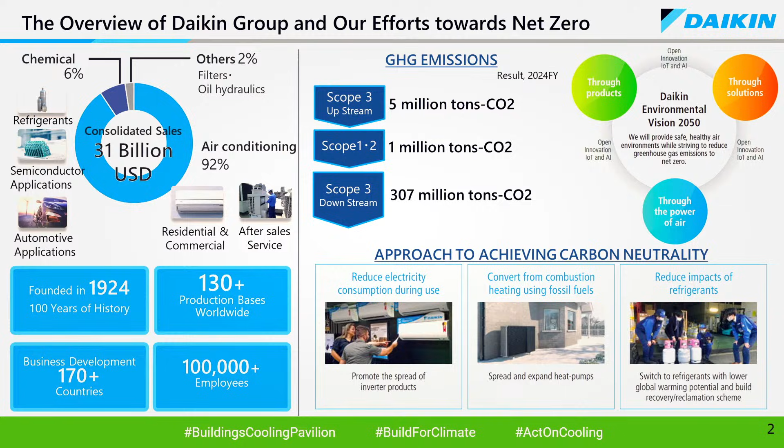We are aiming to achieve net zero by 2050. When we look at the GHG emissions, most of it comes from scope 3 downstream, mainly from energy consumption. This is why our focus is on reducing energy consumption during use, and heat pumps and so on. Daikin also supports the global cooling pledge.

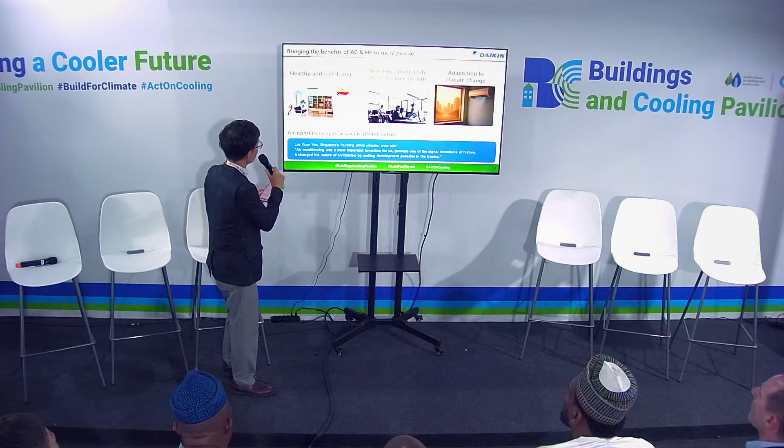As temperatures are rising, air conditioning is becoming a necessity rather than a luxury, as pointed out by Hubert in the beginning. Air conditioning contributes to healthy and safe living, boosting productivity and economic growth, and adaptation to climate change. The demand for air conditioning is expanding as a social infrastructure, and here it is extremely important to curb the rising electricity demand for air conditioning.

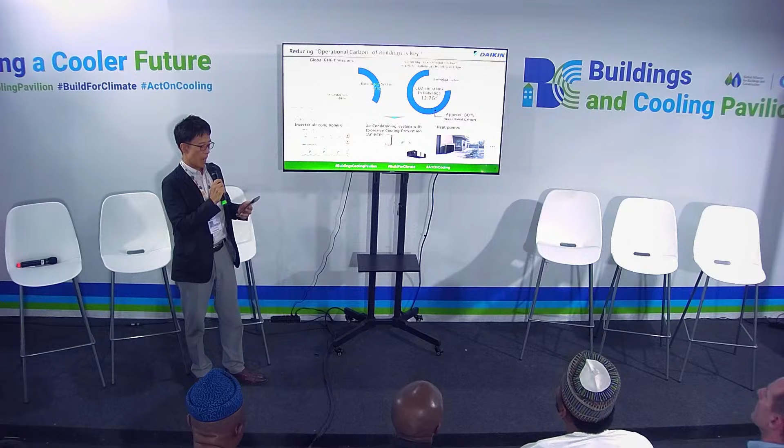When we look at the global GHG emissions, buildings are responsible for 34% of it, and most of it comes from the operational phase, as shown in this figure. So we believe reducing operational carbon is the key to decarbonizing the building sector. We offer solutions such as inverter air conditioners, air conditioning systems with excessive cooling prevention, ECP, which I will talk about later, and heat pumps and so on.

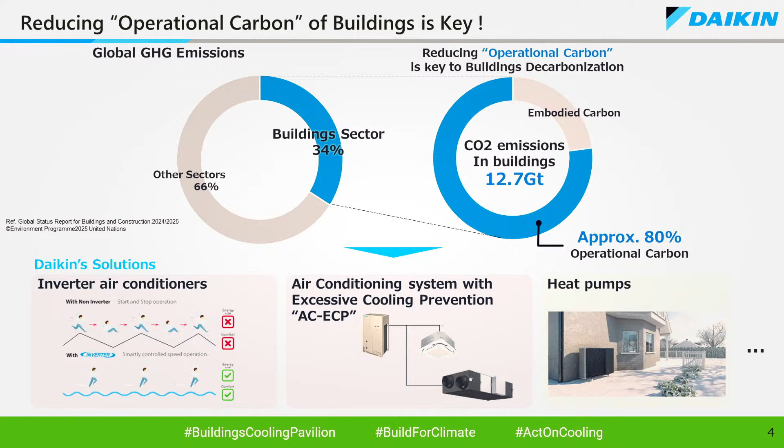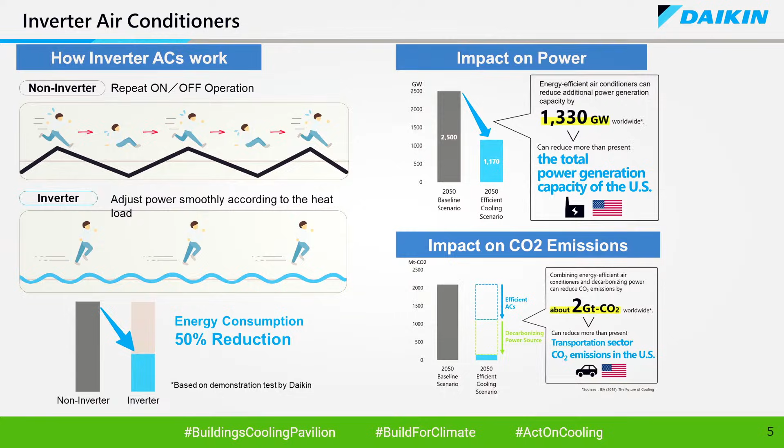First, inverter ACs. Inverter AC optimally adjusts its motor's speed according to the room temperature rather than frequent start and stop operations, and it significantly reduces electricity consumption and GHG emissions compared to non-inverter ACs. As you can see, about 50% reduction is possible just by using inverter ACs.

These tables show how much energy can be saved by inverter ACs in actual use environments. We have demonstrated energy savings in countries around the world, most recently in Nigeria, as Mr. Abdullahi presented, showing a 40 to 48% reduction. It was such a huge reduction. We knew that inverter ACs are very effective, but myself, I could feel that it's really a huge reduction, and it's very important.

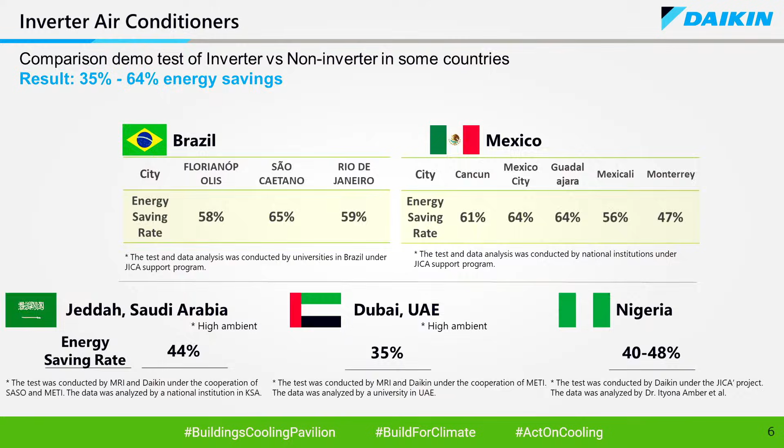However, as shown in this map, there are still many countries where inverter ACs are not widespread, such as Africa, Southeast Asia, Middle East, North America, and here in Latin America. So we need to accelerate.

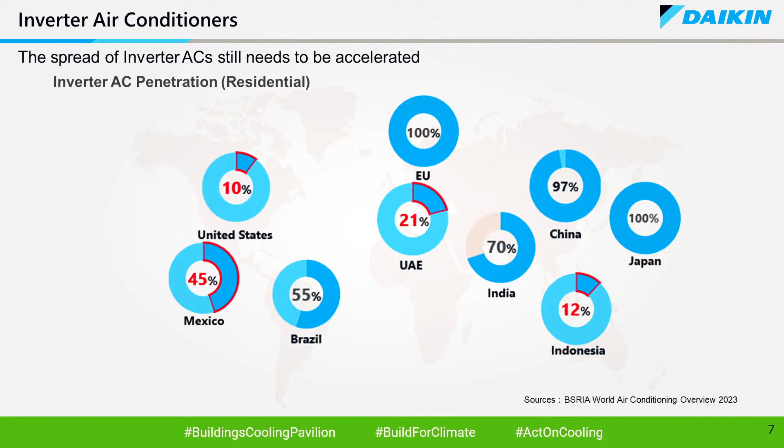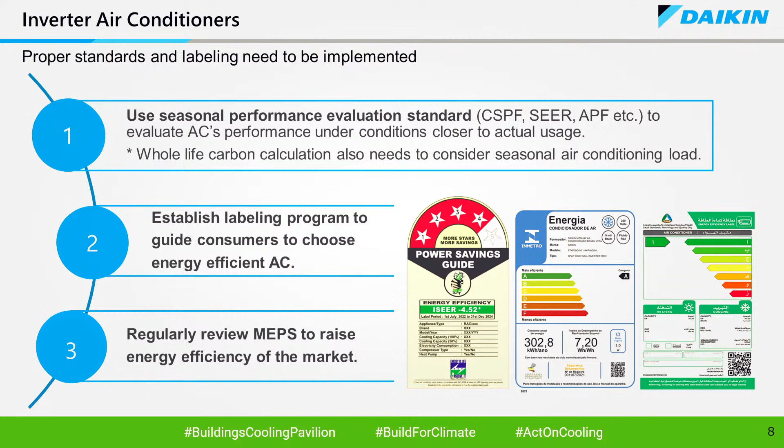We believe proper standards and labeling are key to accelerating its adoption. There are three key factors to focus on: first, a proper seasonal performance evaluation standard; second, a labeling program to guide consumers to choose energy efficient air conditioners; and third, regularly reviewing MEPS, the minimum energy performance standard.

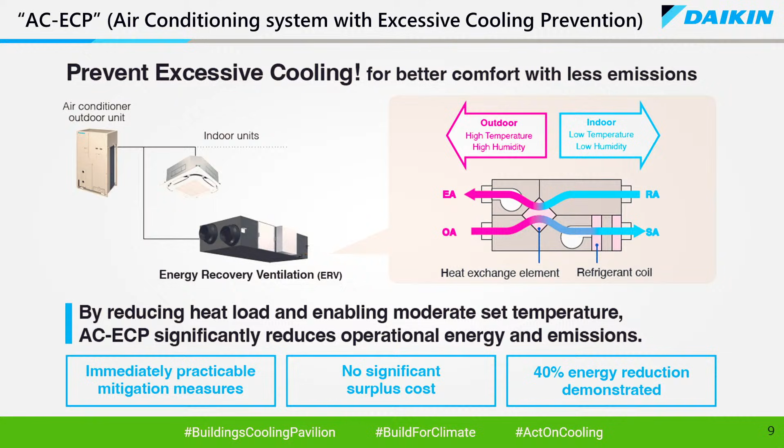If you ventilate rooms in a conventional way when you are cooling, you are throwing away cool air to the outside, and taking in hot and humid air to the inside. But with our energy recovery ventilation, we exchange both temperature and humidity of the air going out and coming in, to reduce the heat load of the air conditioning. Reduced indoor humidity enables users to set more moderate temperature, and this leads to huge energy reduction.

This system is an immediately practicable mitigation measure, and it requires no significant surplus cost. A 40% energy reduction was demonstrated in Thailand.

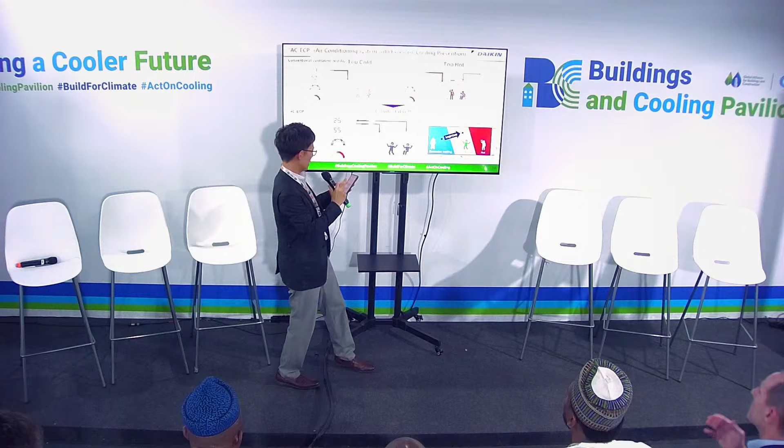Next slide please. This is how it works. When cooling, conventional ventilation systems throw away cool and dehumidified air and take in hot and humid outdoor air. Due to high humidity in the room, we need to excessively cool down the room, like 23 degrees. If they set an appropriate temperature of 26 degrees, due to high humidity in the room, they fail to achieve comfort.

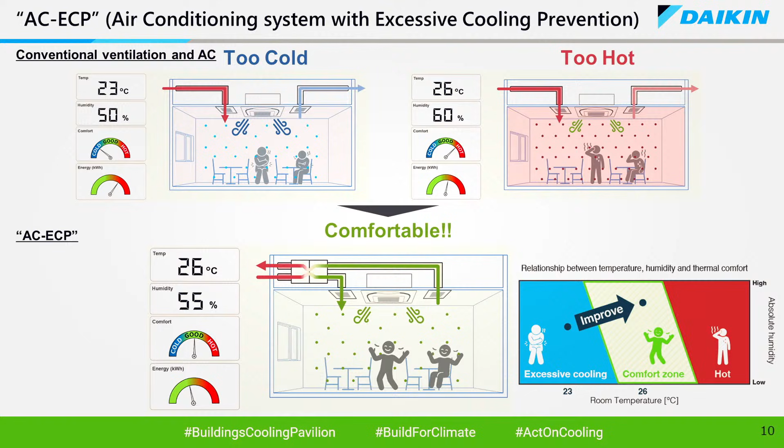But in our system, when we use the energy recovery ventilation, the incoming hot and humid air will be cooled by the air going out, and the humidity will be kept very low. This is why they can set a temperature of like 26 degrees, and still feel very comfortable thanks to the low humidity. This is how our system prevents excessive cooling of like 23 degrees.

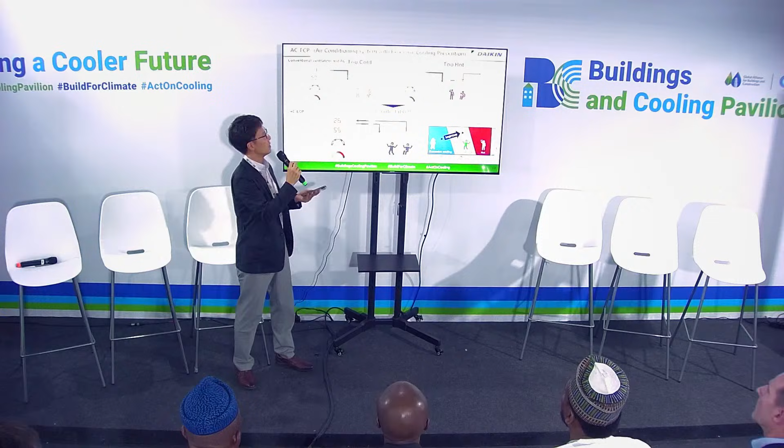Thank you. Next slide please. Finally, this is the result of our demonstration in Thailand. Energy reduction of approximately 40% was demonstrated, while comfort was improved according to the questionnaire.

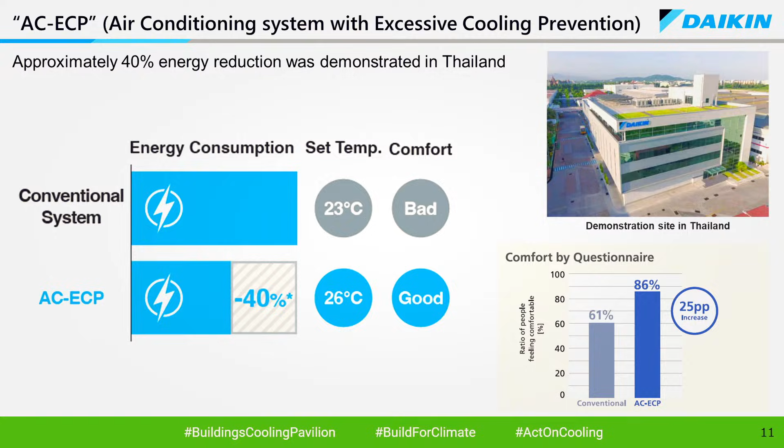Next slide please, thank you. I introduced two of our solutions that can significantly contribute to decarbonizing the building sector: the inverter ACs, and the air conditioning combined with ventilation, energy recovery ventilation. The point is that both of these technologies are not technology of tomorrow, but technology of today that we can implement immediately. As Daikin, we'd like to do our best to help implement these solutions to achieve decarbonization. I'll stop here. Thank you for listening.

Okay, thank you very much. I think the case has been made. In sub-Saharan Africa, we have had a lot of issues about dumping substandard products, but clearly Daikin is telling us that the technology is available. We need to make sure there's an uptake so we are able to get better technologies. We are not reinventing the wheel, technologies are available as indicated by Daikin, and so let's look at the effort to make sure this comes in.

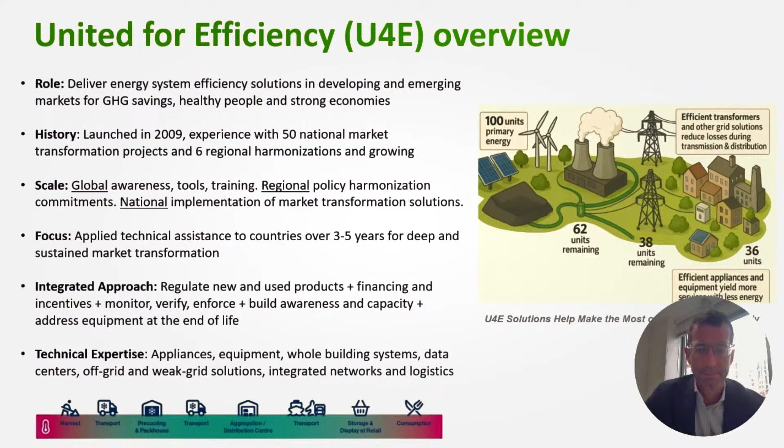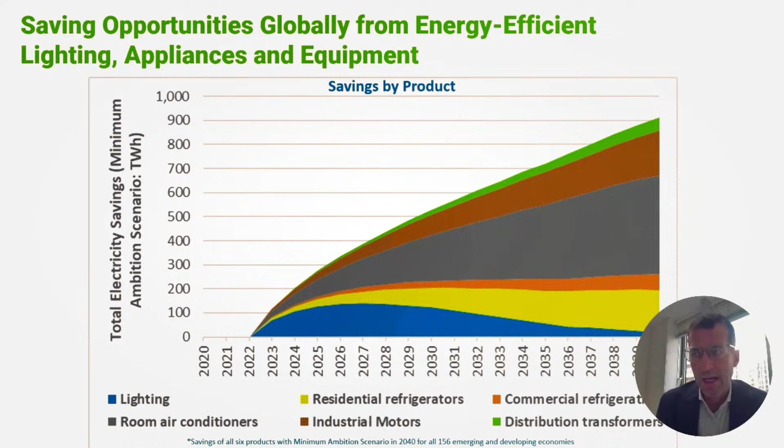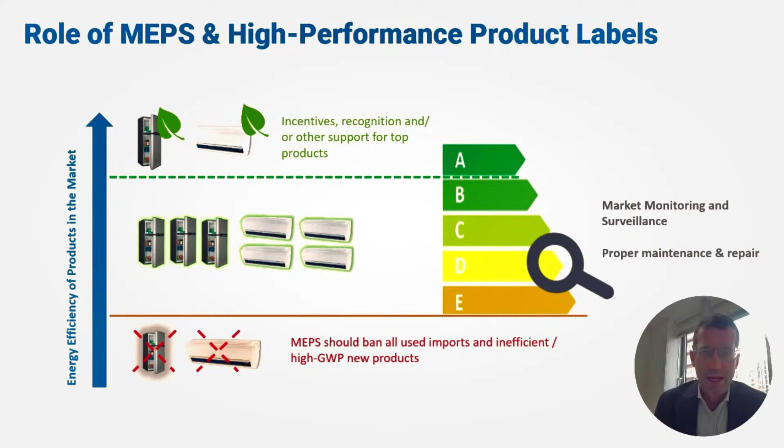On the approach we follow, we work on regulations which set the floor through minimum energy performance standards for products to enter the market. We use labels to incentivize higher efficient products through consumer awareness, and different financial and consumer awareness campaigns to incentivize the market further beyond the MEPS. Throughout that, we work on monitoring, verification, and enforcement, testing products to ensure compliance with regulations, labels, and incentives.

One of the key tools we've developed over the years is model regulation guidelines. We've developed these as templates for countries to utilize for developing regulations or incentives. It's available throughout the different product categories we work on, including residential refrigerators, room air conditioners, commercial refrigeration, and more. It's really a starting point for countries to consider adopting. It includes efficiency targets, recommendations for labels and the tiers within that, and for cooling products, lower global warming potential refrigerants.

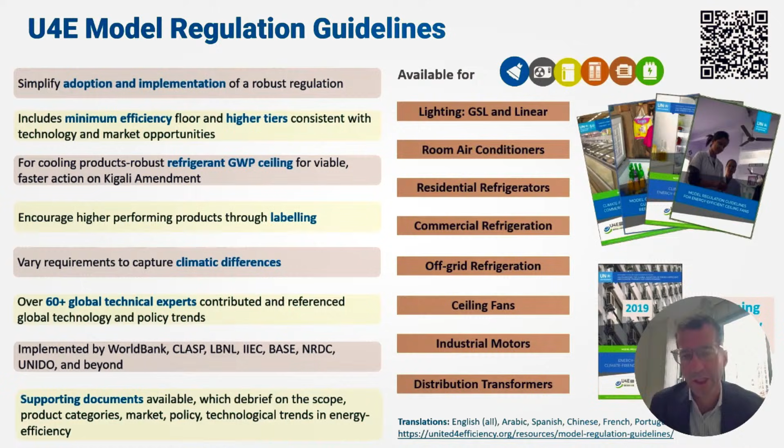I'm also pleased to announce that we continuously update these model regulation guidelines, and recently have done so for air conditioners, where we've expanded the scope to multi-split air conditioners and VRF systems, while increasing the higher capacity ranges, including new heating metrics, and an optional dehumidification performance recommendation. In addition, we've come out with new sustainable procurement guidelines for space and water heating, covering water-based heat pumps, systems, components, safety refrigerants, and life cycle considerations.

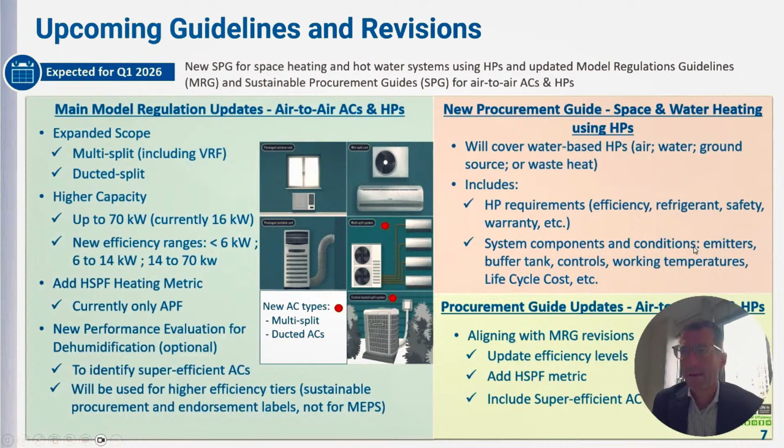Just to show how these have been utilized, we don't only develop them, but we also put them to use. In Southern and Eastern Africa, we've partnered with the regional centers, SACREEE and EACREEE, in their respective regions, and other initiatives with UNIDO and others, to harmonize standards for both refrigerators and room air conditioners. This is a regional standard, so really something that the region and national governments can take forward with implementation in their respective countries. It was developed over about a 2-year period with consultations at the regional and national level, and it's aligned with the U4E model regulations.

Continuing on, also in Southeast Asia, we've worked at the regional level with the ASEAN Center for Energy, and developed a regional roadmap for room air conditioners. I wanted to share that we've recently deployed that in Malaysia, and supported the government in upgrading their regulation for room air conditioners. We supported that with different tools: market assessment, techno-economic assessment, and different technical consultations. This included consultation with over 13 manufacturers to understand their timelines for implementing energy efficient policies.

So with that, I'd like to conclude and encourage you to engage with us, for example through our website, where all those publications, news, and more information on the model regulations is available. You can also subscribe to our newsletter. So with that, I thank you and wish you a very productive event, and look forward to engaging soon.

Hello. Okay, thank you very much. Unfortunately, Patrick couldn't join us here, but I'm sure a round of applause wouldn't be bad.

So basically, U4E has shown that again, we don't need to reinvent the wheel. They have a lot of materials, roadmaps, and benchmarks which we can download from their websites, and also look at it as countries to develop from it.

We have another person joining us virtually from the International Energy Agency, and she's in the person of Madam Sophie Attali.

Wi-Fi. Oh, sorry, you see the technological change. I think I'm being told we have a Wi-Fi issue, so let's wait a while.

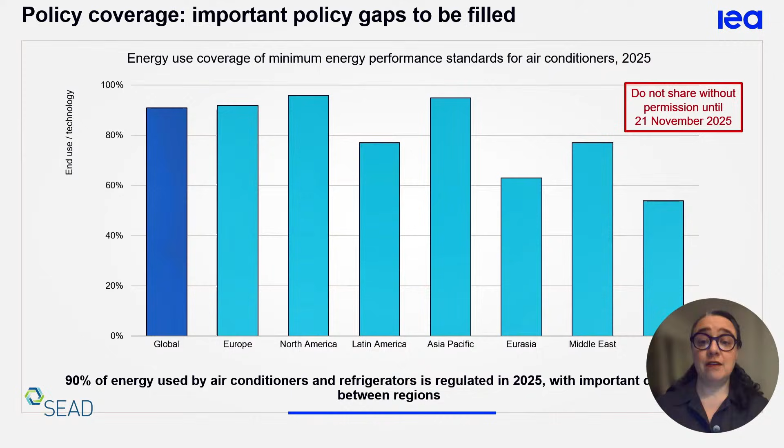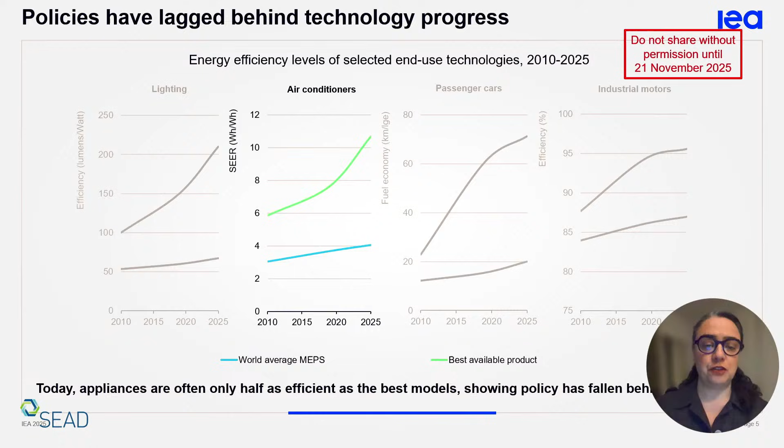We look at the efficiency and how it's matched with the policies, looking at different technologies: lighting, air conditioners, passenger cars and industrial motors. Appliances put on the market in 2010, according to the world average MEPS shown in blue, were half as efficient as the best available technologies shown in green. But today it is much less. This shows that policy has somehow fallen behind technology progress, and many of these MEPS could be strengthened.

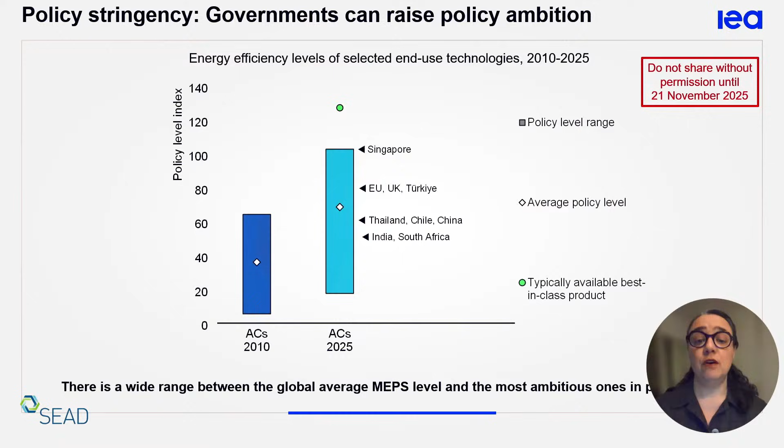This graph shows in more detail the issue of policy stringency. The IEA has developed a policy level index, where level 100 is what we'd need to reach net zero emission goals. The dark blue bar shows the range of MEPS in 2010 for air conditioners, and light blue shows 2025. Globally these MEPS are more stringent today than 15 years ago, which is good news. However, the average, shown by the white dot, is still below 100, and far below the green dot representing best available technologies. Countries are also at different levels of stringency, and it would be important for governments to raise the ambition of these policies, especially given the fast growing demand for electricity for air conditioners.

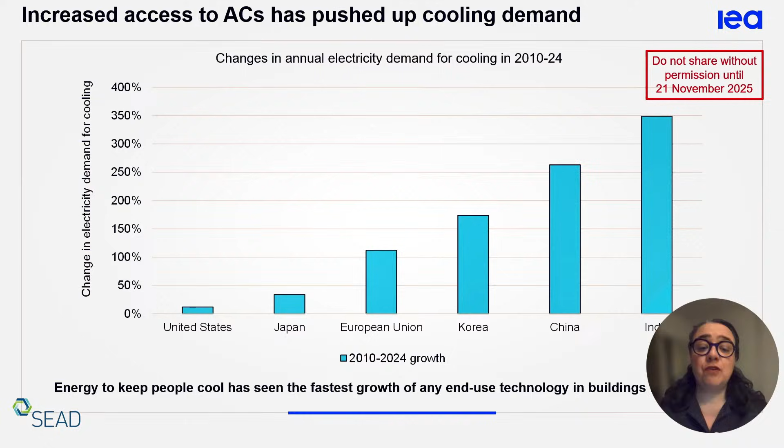We have been calculating the changes in annual electricity demand for cooling between 2010 and 2024. This depends somewhat on how much electricity was used back in 2010, but we see that for some countries the rise has been very significant, with plus 250% in China and 350% in India. Energy to keep people cool has seen the fastest growth of any end-use technology in buildings this century.